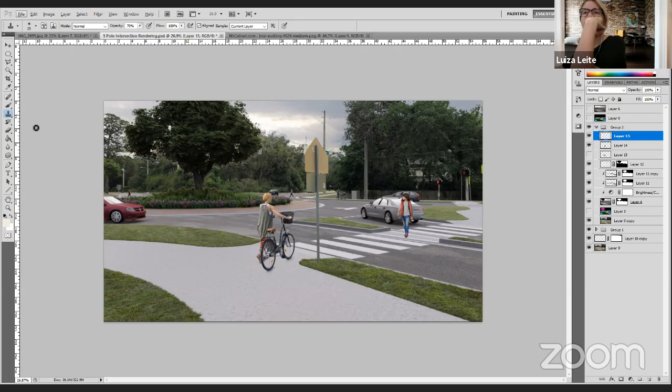So you're good to go on tonight's presentation. I tested the webinar with Sue, and I think that all the panelists can see the questions. So how do we set the panel? Do I just set them when I start the meeting? No, I already sent invites to Rick and Victor and myself. Okay, so I just added their email addresses.

I see that, but you can also, if for some reason it doesn't work, you can go to their name on the participants list and make them a panelist, because I did that with Sue - I made her a panelist for a second to see if it worked. Okay, so I can change it when we're in the meeting. Yes.

And if you need help, like sorting out questions and things like that. So did you practice that with Sue? Yeah, so she asked a question and I was able to - you can click answer live or answer right now, or you can share your screen of sketches so that someone has something to look at currently.

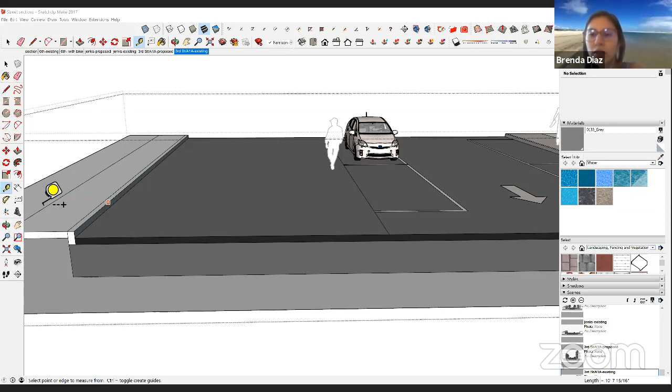Are you on mute on purpose, or do you need me to unmute you? I was on mute on purpose. Okay, just wanted to make sure. Yeah, no, I know, so yeah, I know, it's just a lot of noise in the background of my house, typically because I have kids and stuff. No worries, no worries. If I have to say anything, thank you for checking though. Yeah, of course, let me know if you have any questions. Will do, thank you.

Hello, how are you? Hi, good. I thought maybe there would be a larger group on. Oh no, we've been getting one or two at a time, and then people drop in and out.

Okay, I was on earlier, so I won't stay on. I for some reason thought a big group was coming on at 3 o'clock. Oh, that's a different meeting that Mary Frojo is hosting, a different link. I'm not sure exactly what it is, but she posted it on Neptune Strong and on the Facebook page. Is that the one you're looking for? Yeah, okay. All right, Brenda, I'll see you tonight at 6 then. Yeah, no problem. See you later. All right, bye.

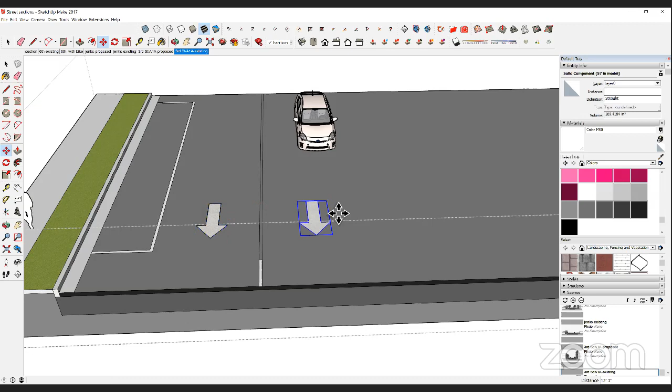Let me try my computer audio. Hi, how are you? Hello, how's it going? Well, yourself? Good, good, good.

Just working on some street improvement modeling here, modeling the existing conditions of A1A slash 3rd Street. You're modeling the existing right now? Yes, and we will do a before and after of the conditions that are existing and what we're proposing.

Hey, Brenda, was that a concept I see on the YouTube thing on the left? Was that the roundabout render perspective? Where do you see that? Oh, I was just talking about this, on the main page, before you click the virtual charrette, it has Open Design Studio. Oh, this is on the web page. Yeah, so that's what Luiza was working on, and you'll be able to see that tonight. She'll be presenting that.

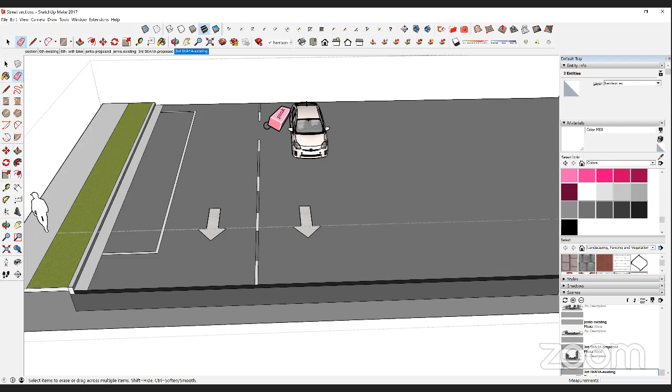Are you both planning to attend tonight's event? Yeah, that's my goal. Great, so that's where you'll be able to see some of the plans and illustrations we've been working on the last couple weeks. We'll show the pros and cons of each option, break it down, and also have diagrams that show how to use the roundabouts.

So I'll share with you some of the preliminary, very rough sketches of what we're thinking about for improvements for 3rd Street A1A. Can you see my drawing here? Yeah, it's a red line.

So what I'm modeling currently is the existing conditions. This helps so people can see how we can fit these improvements within the existing right of way. A lot of times people don't understand that concept, and it's hard for them to visualize that we're only using the space allocated that is owned by the city or FDOT. This is really helpful for them to visualize, and we'll do a fade of the existing conditions and how it progresses and changes to the proposed conditions.

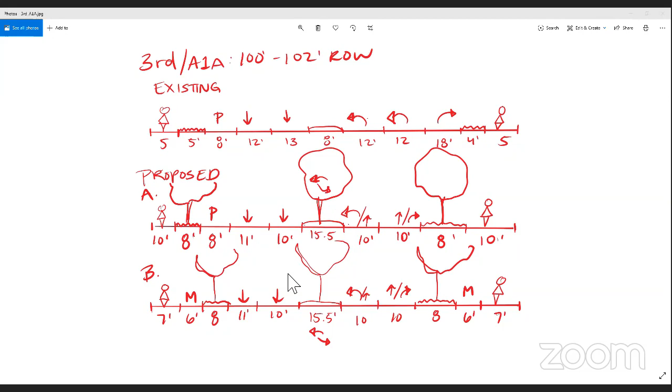Yeah, we do have that information. I'll show you right now, on the map. We're really focusing mostly on the section from Lemon Street to Atlantic Boulevard. So the proposal that we're doing is really focused on Lemon Street up to Atlantic Boulevard, and the cross section I'm showing is right about here in the middle.

In plan view, we'd probably have to add any of those improvements and see how those work right at the intersection there. James is actually working on a model, and it connects Lemon Street here. We talked about that at our pinup yesterday, how do we include that information in the model? Cool.

Very cool. Yeah. Hey Brenda, you probably love when people hop in like this and completely hijack your workday. It's okay. But when you come down, this is all super exciting. So I love this stuff.

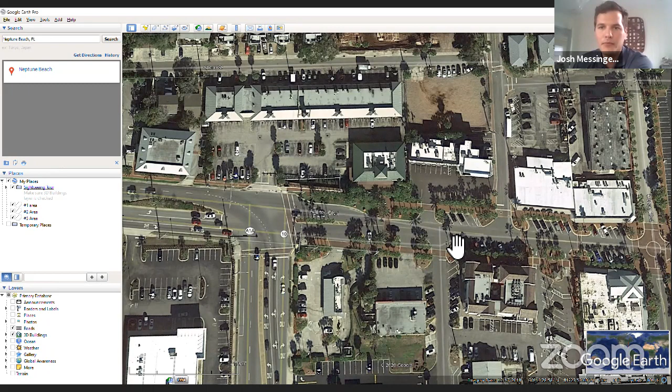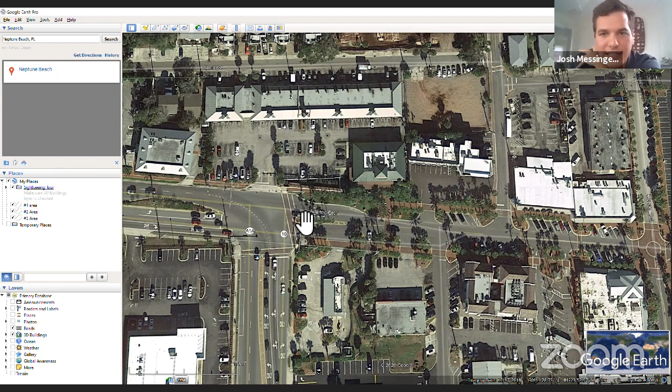Which is just slightly more east of where your cursor is. So has there been thought about that intersection, deflecting cars or creating some type of... yeah, I see you smiling.

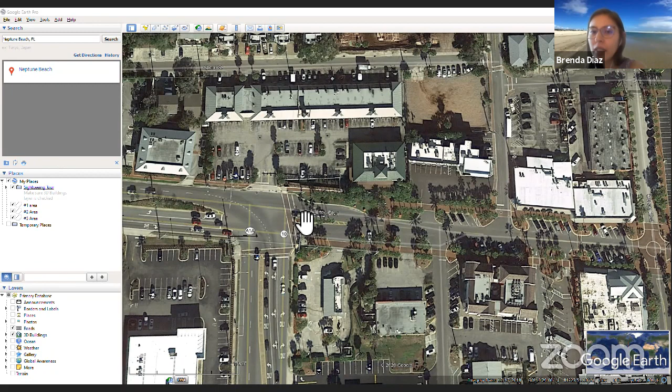So let me share with you. I'm working on a couple streets, actually. The next street I have that I'll share with you is Atlantic. And this street section is a draft.

This is actually changing completely now. What we're going to do is, because we saw that A1A 3rd Street and Atlantic Boulevard have very similar right-of-ways in most of the street, we're actually going to propose the same conditions for both streets.

The ocean is right here. Or Neptune side, Atlantic side, delineate that because I think people get confused. Yeah, I will. We will.

Yeah, this is internal. But so these were sections that I was working on, but after we talked a little bit more we realized that, you know what, why don't we just make both conditions the same, where we can propose the same thing.

Can you see the third A1A now? I see A and B still. Okay, here, let me share the other one.

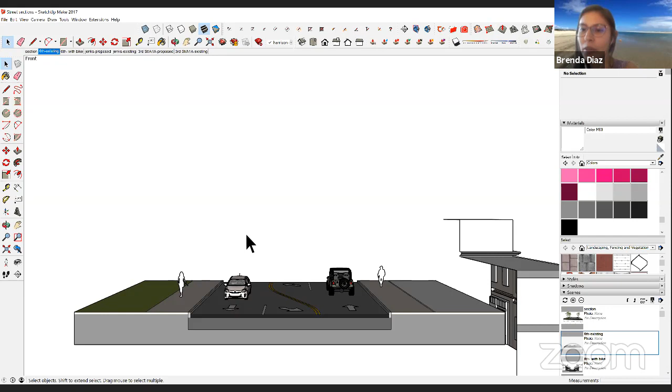I just want to show you really quick - this is what we did for Panama City. We worked on their downtown master plan. So this is what the existing conditions look like for a street called 6th Street there.

We did a proposal where it had a bike lane, a separated bike lane, similar to what we're proposing for option B. So you see the sidewalk here and the bike lane, and then you have the tree well - that's what it'll look like.

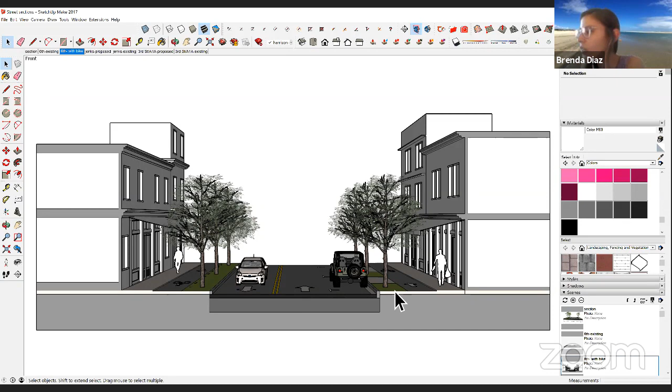Disregard the buildings, that's not what I want to show you - don't want to cause a lot of panic. I just wanted to show you what it would look like with the sidewalk and the bike lane or mobility lane and the trees and planting strip. You can also see that the tree wells give us little spaces for people to cross. That's about the level of detail we'll be getting into. So don't look at the buildings, this is just an example.

That's fantastic, for the record, for everyone watching. Yeah, that's cool. That's what I'm working on right now - I'm going to model the existing conditions, and then we will have another proposed model that shows what it'll look like.

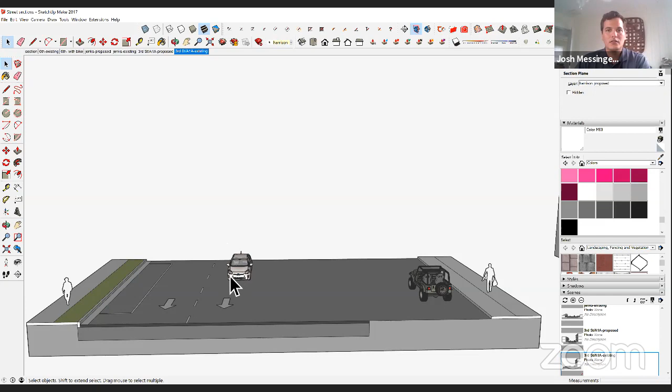I think you are frozen. Okay, I think you're back. Can you hear me? Yep. Sorry, I think there's just a lag on the system. We're getting some rainstorms here, so I know my internet - it's like we're in the 90s, bad weather comes and your internet slows down.

Well, I'm glad that you like those options, that's really good to hear. Option B had won, I think, both of us over, so there you go. Fantastic, well, this is awesome - I'm even more excited than I was before, but I'll get out of your hair and let you get back to it.

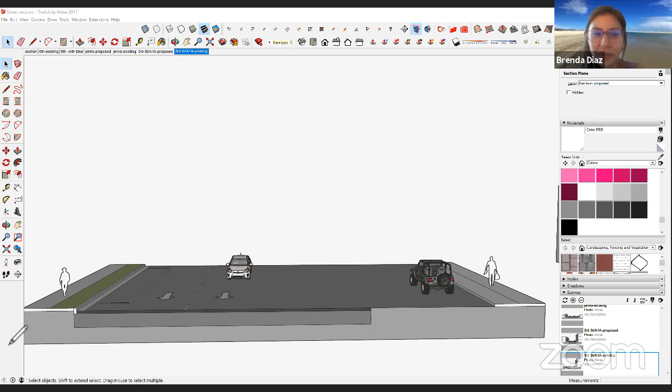All right, great. Put up your sketch if you're screen grabbing it - put up your sketch of 3rd Street. Okay, let me do that. Okay, that's better, got to think about these things. Yeah, good point, good point. All right, is it up? Do you see it? Yeah. Okay, all right, thank you. Yep, awesome, very cool, thanks so much.